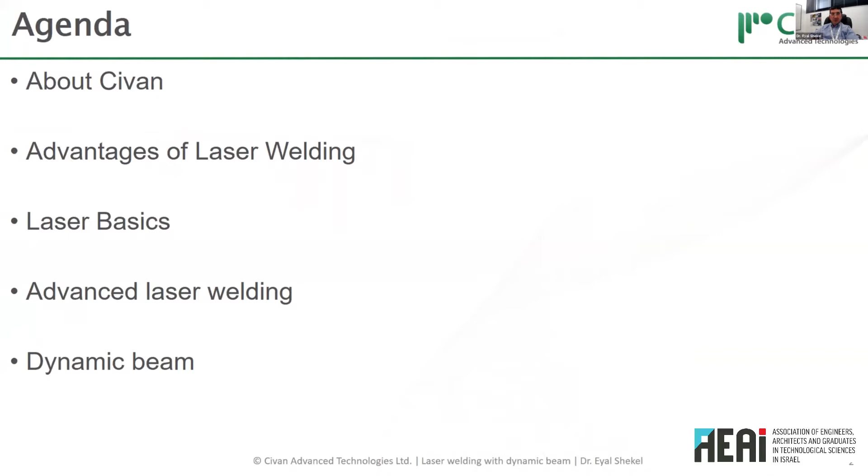So, as Shlomo said, Civan was established in 2008. What we do is manufacture high-power lasers based on coherent beam combining for material processing. We are 180 people, operating from 5 floors. We have a building in Jerusalem, 3,500 square meters. We have a proven track record with many customers, and we've been selling products for the last 12 years. We are a vertically integrated company, meaning we have in-house production of all the core technologies. We have more than 50 patents, and we do a lot of collaboration with many different research groups in Israel and abroad. We're based in Jerusalem.

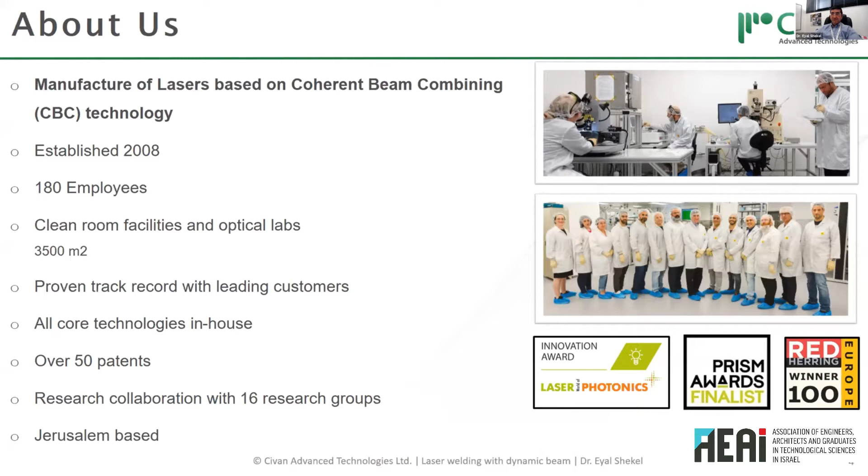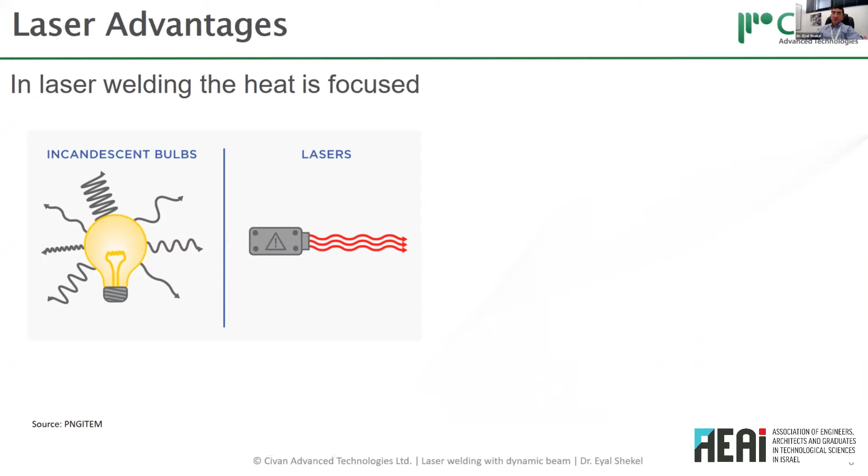So, what is laser welding? When we compare laser welding to regular welding, first let's start with: what is a laser? A laser at the end of the day is just a source of light. When you sit in a room like this, you have probably a few hundred watts of light in the room. But if you take a laser with a few hundred watts, you can actually cut metal. The difference is that a regular light source scatters light all around, whereas in a laser, all the light is focused and directed in one direction.

The result is that when you use a laser for welding, all the energy is focused and all the heat is concentrated, and you can get a very well-defined, narrow weld, compared, for example, to a tungsten arc, where the heat is spread over the weld and you get a much broader weld.

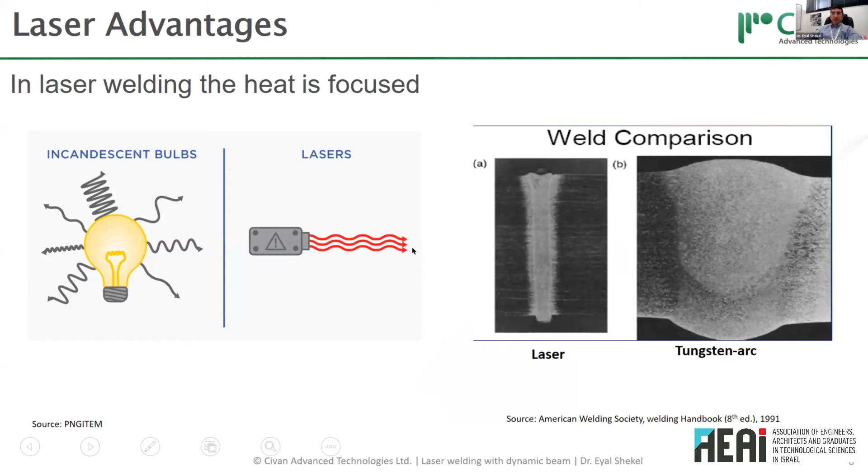So that results in a few advantages. First of all, the fact that all the energy is focused means you have a very small heat-affected zone. You can get much deeper penetration. The overall part has much smaller distortion. You can get faster welding speeds, and you are much more efficient using your energy. All this is because the energy is focused to a very small area, and basically in the time it takes the heat to move away from the weld spot, you get the welding process running before the heat spreads out.

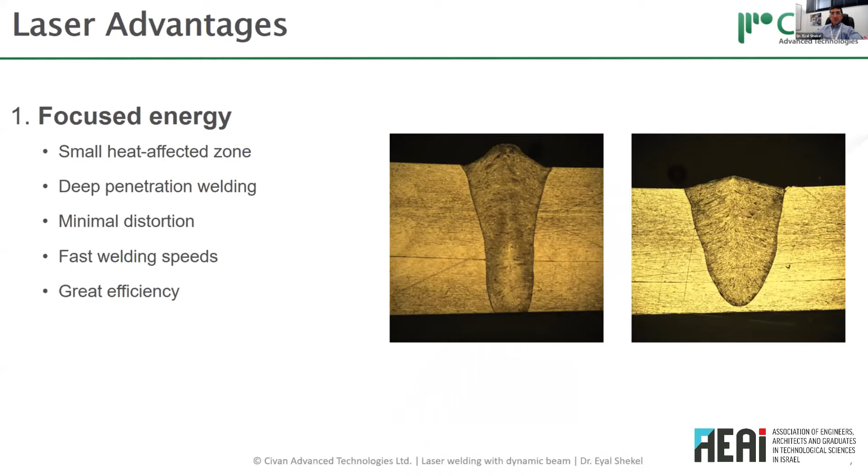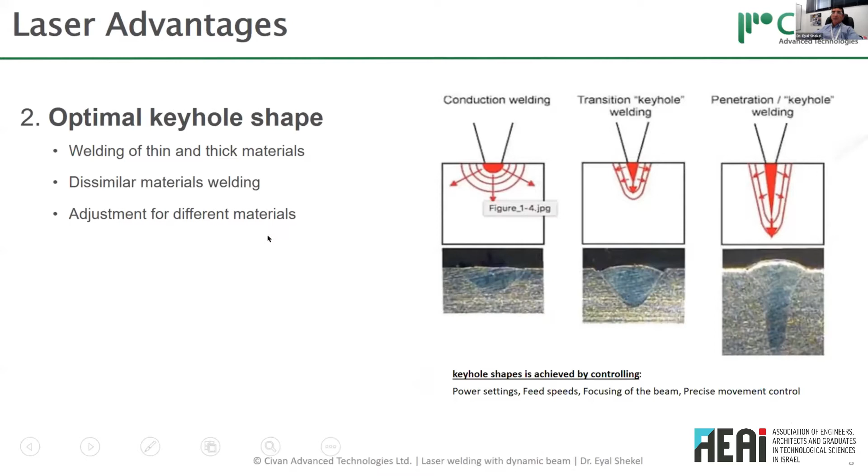Another advantage is the ability to do welding without a wire. Compare this to TIG welding where you have filler wire - in laser welding, you can do the welding without the filler wire. That gives you a much more flexible process because you don't have to make sure the wire gets to the right place and you don't have to feed the wire. So you can do remote operation, and the process can be easily automated.

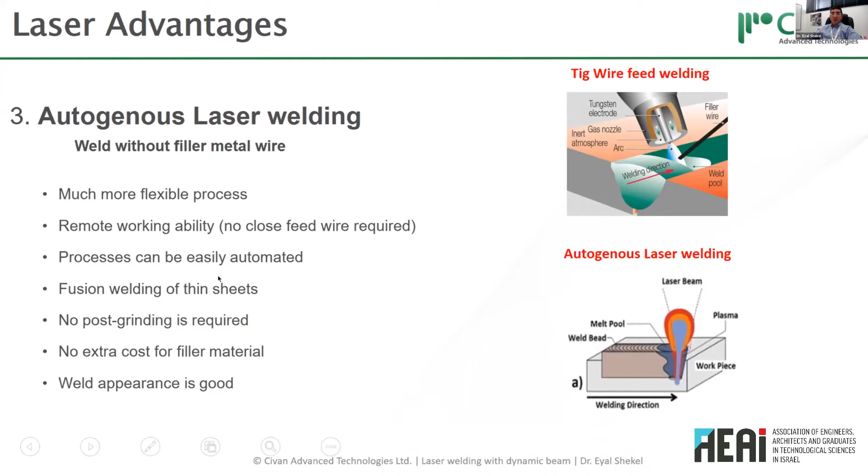You can do welding of very thin materials where there's no room to add a wire, and there's no post-processing needed after the weld.

So what is the basic concept of a laser? One of the most important concepts is the beam quality. As we described, one of the big advantages of the laser is that you focus the beam to a very small spot, but the ability to focus to a small spot has to do with beam quality. What we see here is a Gaussian beam, called a single mode laser with a Gaussian beam. This is the optimal beam shape, which allows very good focusing capabilities, compared to a multi-mode beam, which has lesser properties.

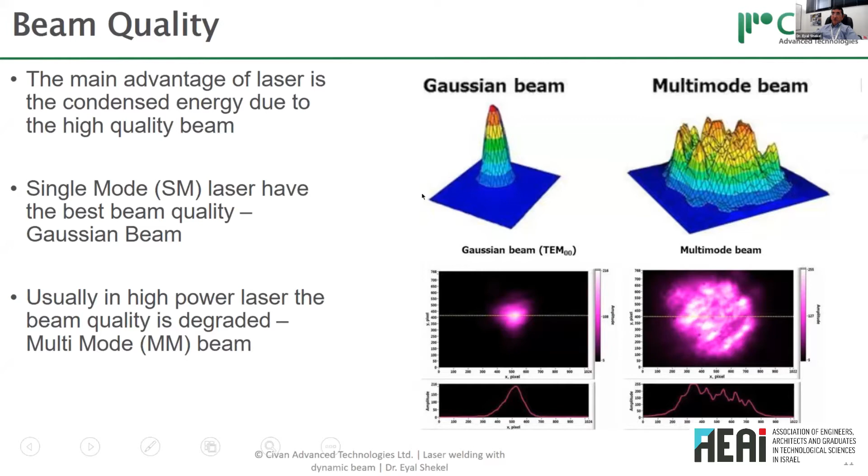Usually when you go to high power laser, the beam quality is degraded because you have to take a lot of power and concentrate it to one place - we'll talk about this in a few slides. But basically, the difference between a single mode beam and a multi-mode beam has two effects.

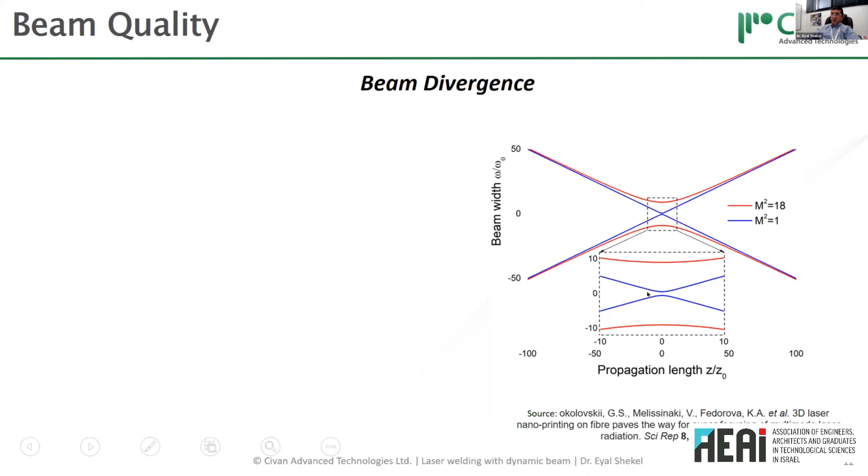First of all, with a single mode beam, you can get a much smaller spot. If you start with the same aperture with a multi-mode beam, shown in red here, compared to a single mode beam, you can see that the single mode beam can achieve a much smaller spot size.

The other thing is that the depth of focus is much bigger in a single mode beam. What you see here is a single mode beam that starts from a smaller aperture, gets to a very small spot, and this small spot is maintained over a large depth of focus. Whereas in a multi-mode beam, in order to get a small spot you have to use big optics and focus the beam very sharply, but then your depth of focus is very small - meaning when you move a little bit out of focus, the beam size becomes very big.

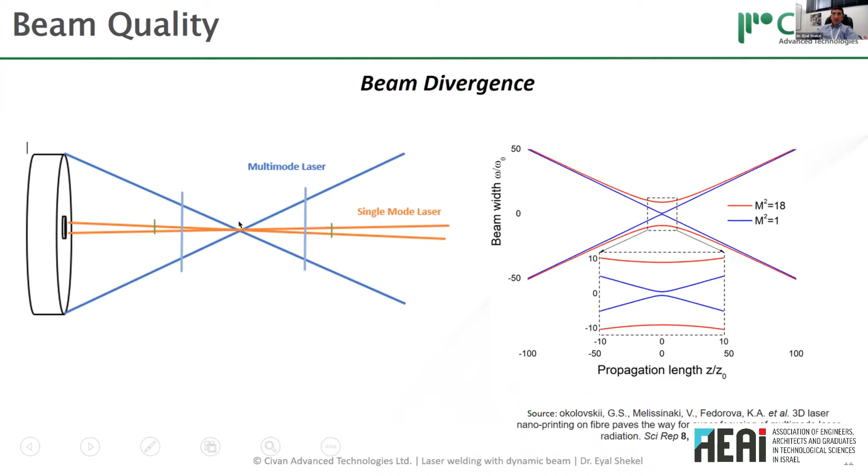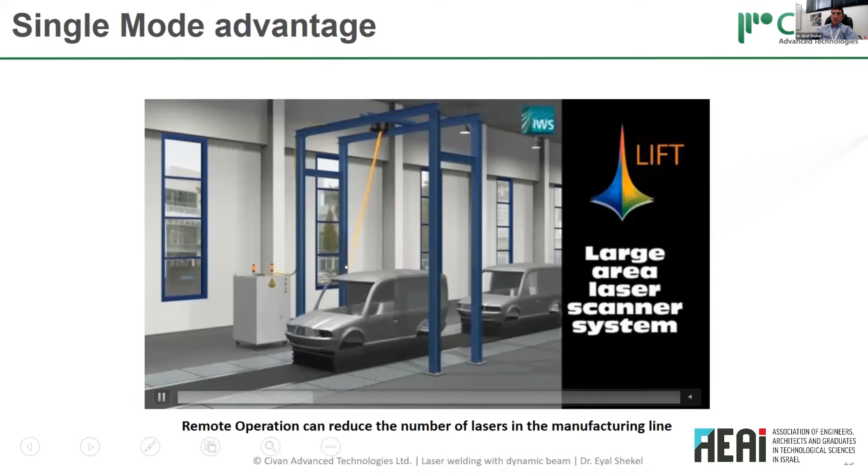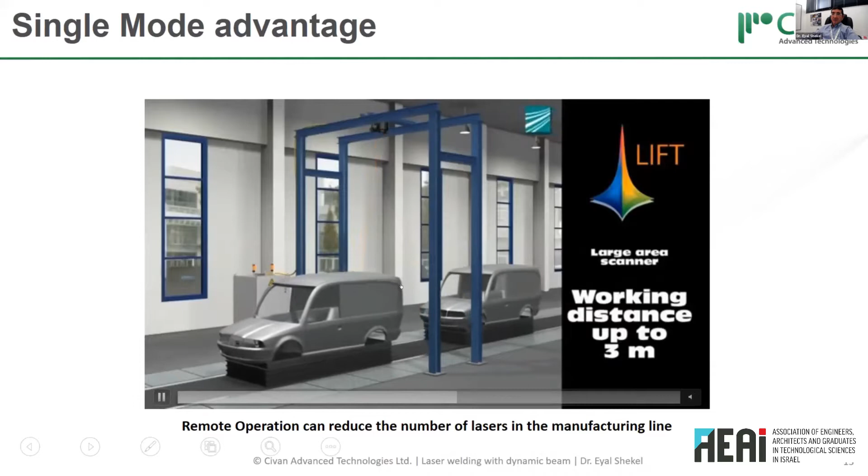So with single mode, the advantage is that you can work from far away - you have a very deep depth of focus and a very small beam even when working from far away. That means you can have the laser with fiber coming to a mirror, and the mirror scans and jumps from place to place, enabling remote operation.

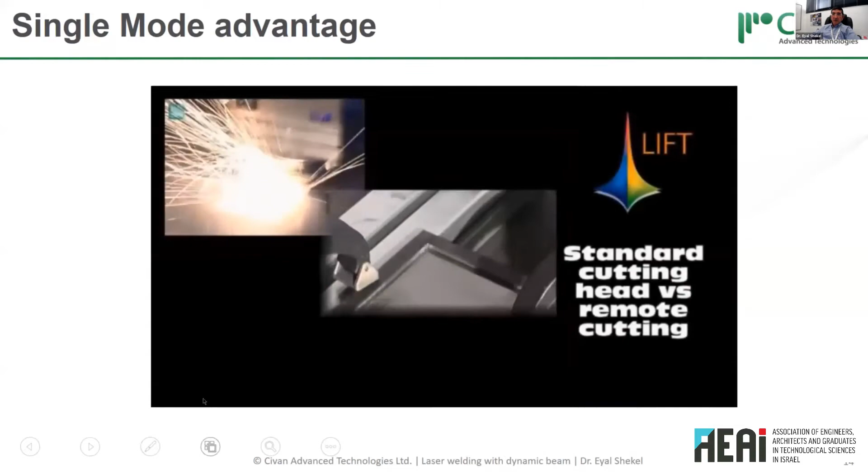Now this remote operation has another advantage, and that is speed. What we see here is a multi-mode laser cutting thin sheet metal. Going back a bit - because the depth of focus is small, you have to work relatively close to the workpiece, and then the whole laser, the whole optical head, has to move in order to make the cut.

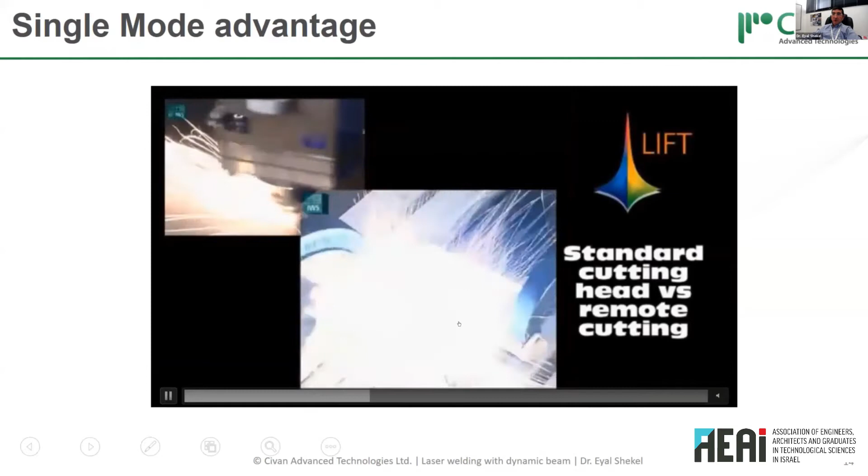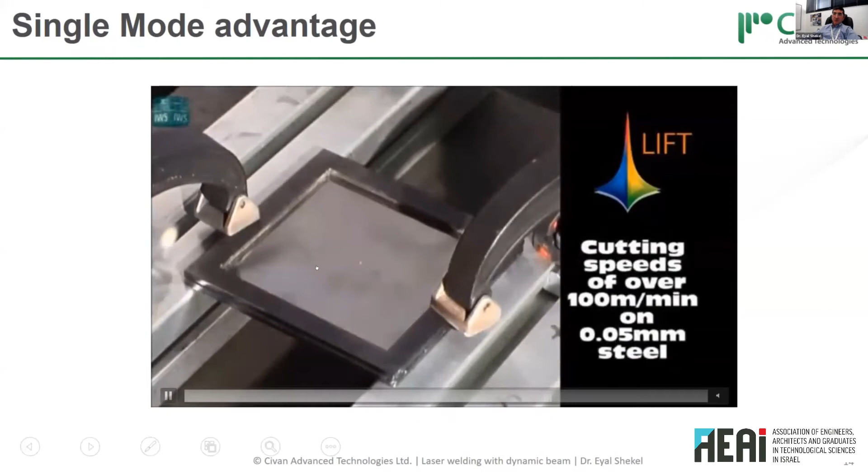So we discussed until now just general laser welding, but with a laser you can do advanced welding by adding some additional features to the laser.

What we see here is an example of welding aluminum tube to a die-cast metal. When you just try to weld them, you get a very poor quality weld. The reason is that aluminum and die-cast have completely different properties, both in terms of heat conductance, heat capacity, melting temperature, and so on.

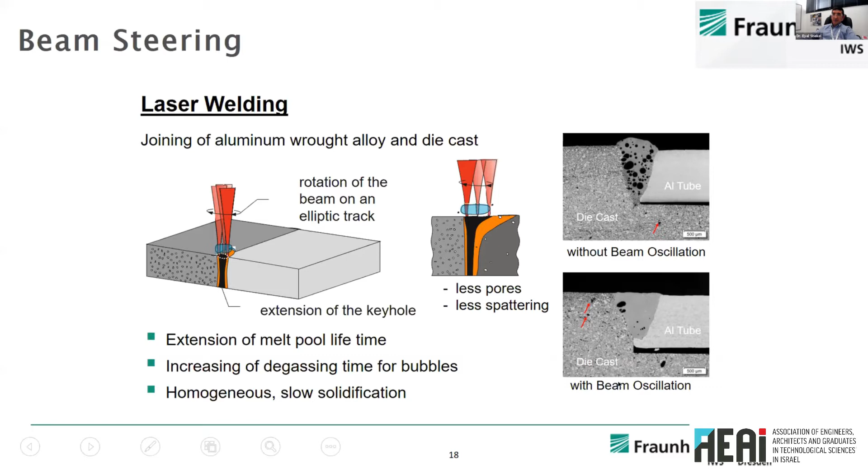If you would just come with a heat source and try to weld these two dissimilar materials, you get a poor quality weld. But if you have a laser beam - a small, narrow laser beam - and move it around inside the melt pool, you can control the energy distribution, the heat gradient, and heat distribution in order to get a very good weld between these two materials. This again is work done by Fraunhofer IWS.

Another similar example is overlap welding, when you want to weld copper to aluminum. If you just come with a single heat source, or a standard stationary laser beam, you get mixing of the materials and a very poor quality weld.

But if you move the beam around by oscillating it, you can control the width and depth of the weld. You can control the lifetime of the melt pool and the temperature gradient of this melt pool, making sure you don't have any mixing and no intermetallic phases - resulting in, overall, a very, very good weld.

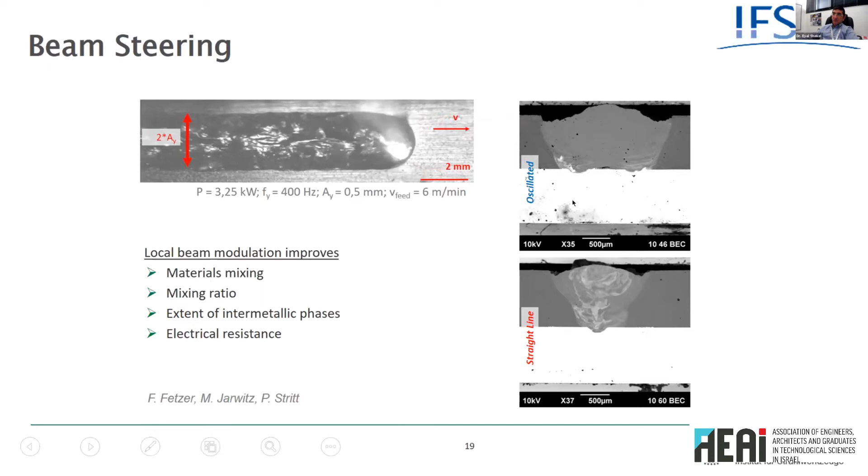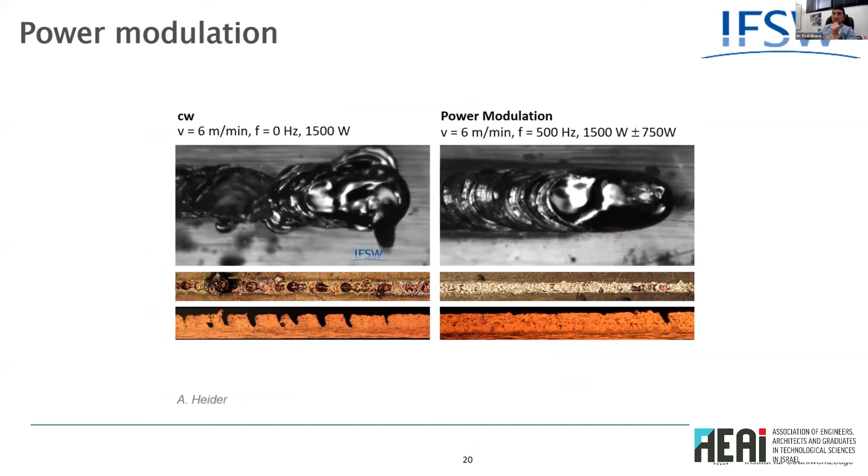Another example is welding of copper, and what you see here is a lot of spatter. This spatter occurs because you have a lot of power going into the material, causing explosions. But if you can modulate the power, reducing it before spatter is created, you can actually achieve a spatter-free weld. This is work done by University of Stuttgart, IFSW.

So what we see is that when you want advanced methods of welding, you need much better control of the beam. It's not enough to just take a lot of power and concentrate it in a small spot; you actually want to control the melt pool. Many companies are working on beam shaping or beam steering.

For example, nLIGHT has the Corona laser that has different shapes for the beam. You can see a small spot, larger spot, donut shape, different types of donuts, or even combining energy in the center with the donut. You see the same thing for IPG, what they call the AMB, and the Coherent ARM, where you can have a spot, a donut, or a combination of the two.

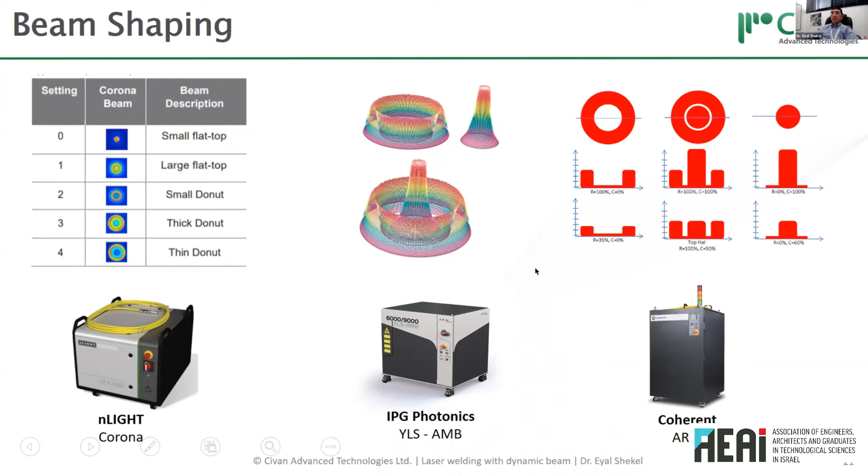Amada also came out with the Ventis system, which has beam steering. Basically, they take a small beam and move it around to create this beam steering, again for controlling the melt pool. And IPG also has beam steering to control the melt pool.

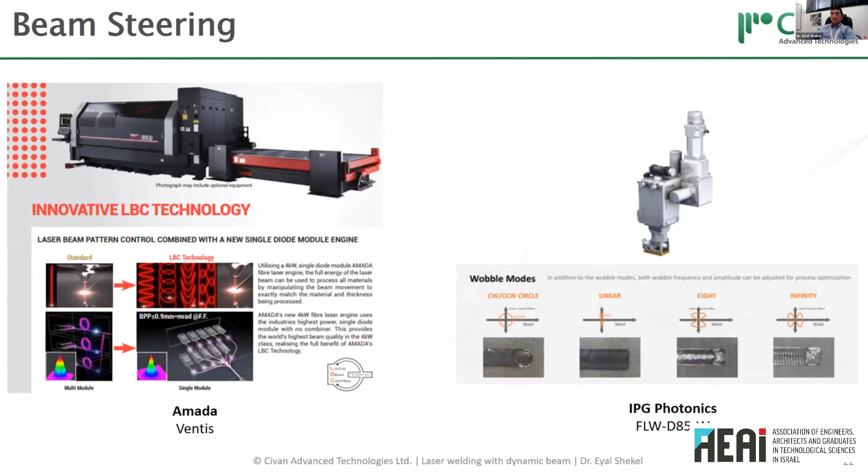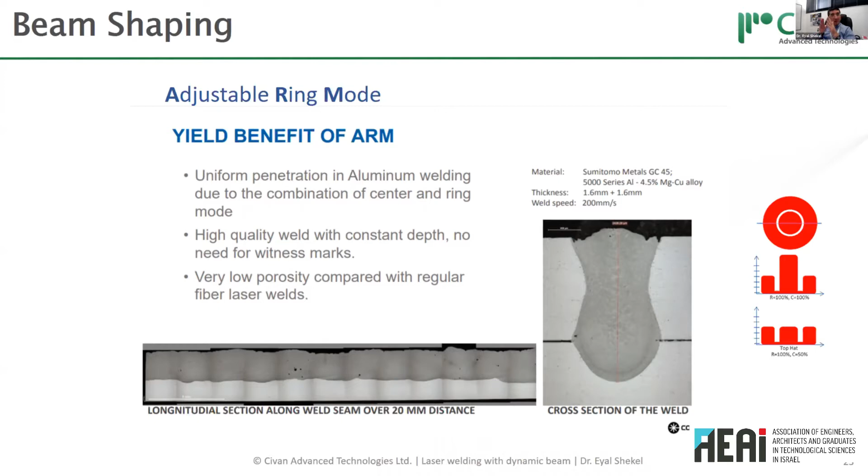This is an example where they use a donut with intensity in the middle, for welding aluminum. You can see a very good weld, no cracks, very uniform penetration along the weld, and no porosity at all. This is achieved by a sophisticated beam shape, not just a Gaussian beam or a top hat, but rather a more sophisticated shape.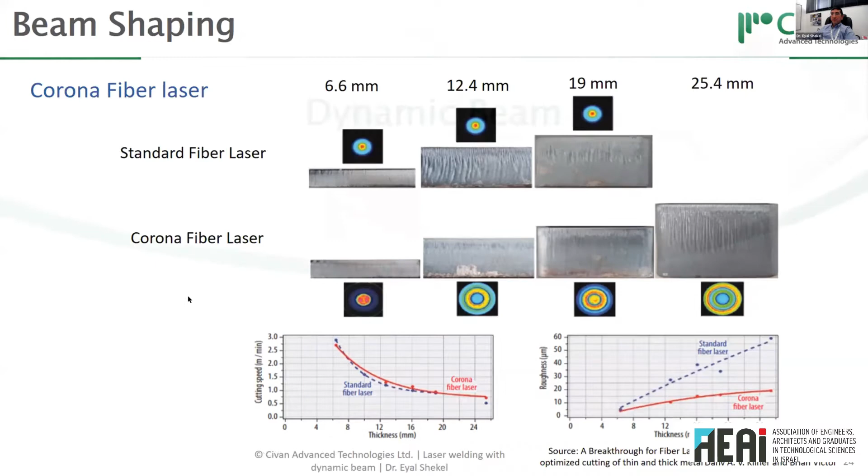So what we saw so far is, first of all, the advantages of laser compared to standard welding, where a laser can focus the energy to a very small spot, concentrating all the heat, giving us a much cleaner, smaller heat zone. Then we showed the more sophisticated beam shapes that allow for a higher quality weld.

And what I want to show you now is Civan's dynamic beam, which is really the most sophisticated way of doing beam shaping and beam steering. The Civan coherent dynamic beam is based on coherent beam combining. So what is coherent beam combining? Just in a few short slides.

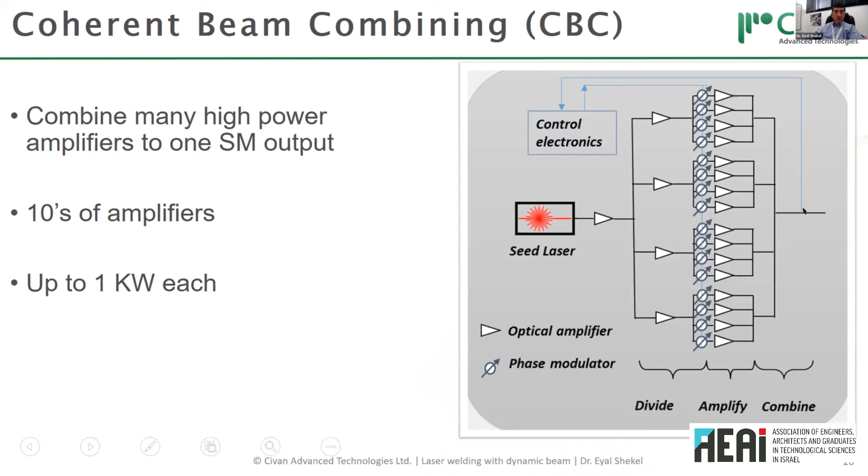The idea of coherent beam combining is that we can take many lasers and combine them together to work as one single mode output. As I mentioned, you can have a high power laser with a single mode output, but when you go to high power, usually the beam quality is degraded. The unique thing about coherent beam combining is the ability to get extreme high power while still maintaining very high beam quality, plus, as I'll show, the ability to control the beam shape. So what we see here is a schematic: we have a seed laser, we amplify it, control the relative phases, amplify in many amplifiers, and combine them to get a single mode output at tens of kilowatts.

There are two methods to do coherent beam combining. One is called filled aperture with a single mode output, where we take several lasers - in our case, tens of lasers, each with a kilowatt output - to a common optical element. By controlling the relative phases, we can have the energy of all these lasers coming out as a single mode output.

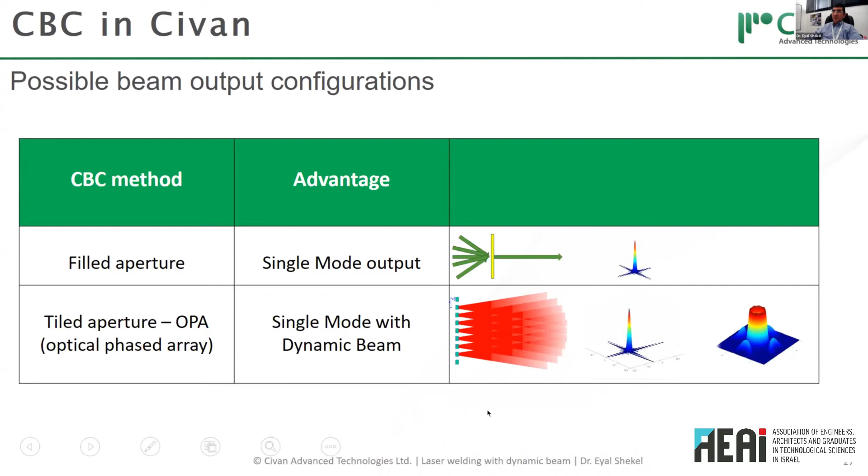The other method is called optical phased array, OPA. The idea is that not only can you get a single mode output, but you can actually control the position and shape of the combined beam. Here we can get more than 100 kilowatts with a single mode output and a dynamic beam.

So how does that work? Every laser, when you turn it on, will have some kind of cone of light coming out, creating a spot of light. When we turn each laser individually, each will create its own spot. But when we turn all the lasers on together, there is overlap between them, and in the overlap zone there is destructive and constructive interference between the lasers.

In places where there was light before - in this whole cone of light - you actually get destructive interference, creating areas of darkness or very low intensity because of destructive interference between the different lasers. And all the energy from all these lasers is concentrated in this area.

So what we get is these lasers overlapping to create this interference pattern. By controlling the relative phases between the lasers, we can control the output beam to change position, shape, focal distance, and so on. We have full control of the output beam shape, position, and focus just by changing the relative phases.

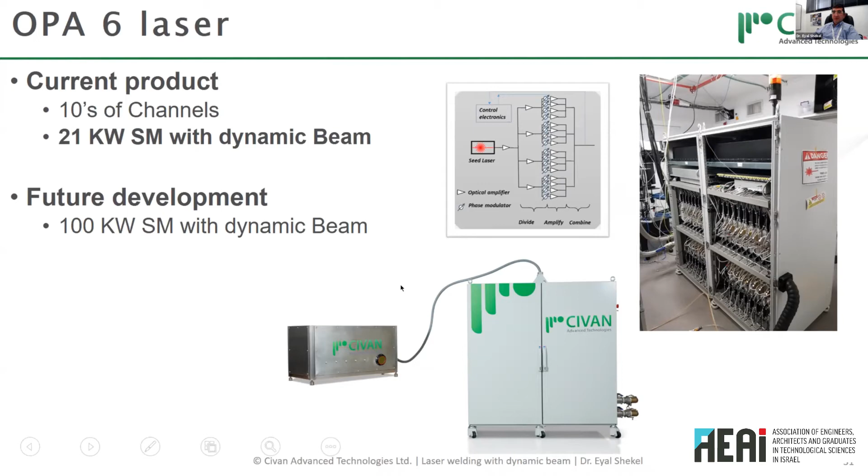So our dynamic beam can do any arbitrary beam shape. We can do beam steering, basically moving the beam around. You can move the beam either at megahertz speed, which effectively is like having a beam shape, or at kilohertz, which is really steering the beam inside the melt pool.

For example, here you can see any arbitrary shape. For welding two dissimilar materials, you can deposit a different amount of energy in one material than in the other.

We can change the focus, so you can focus the beam in the depth of the material. We can also do power modulation, like we showed before, controlling the melt pool to have a spatter-free weld.

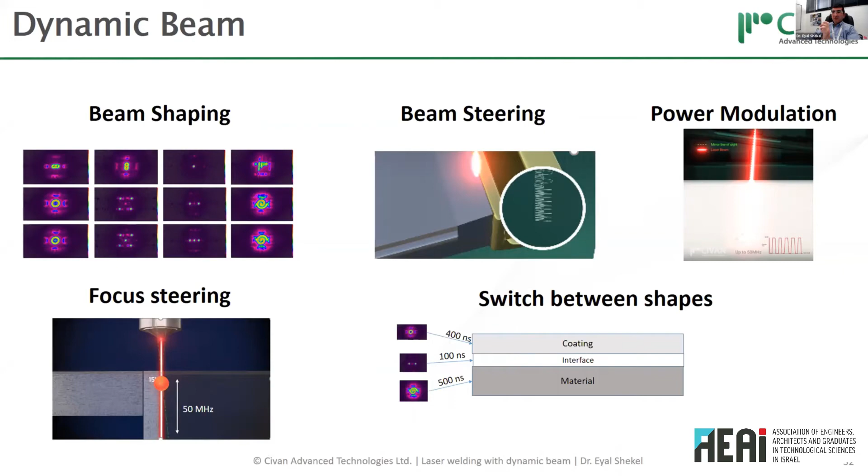Also interesting: if we try to drill through composite material with several layers, we can change the beam parameters as we go through. For example, if it takes 400 nanoseconds to drill one layer, another 100 nanoseconds for the second layer, and another 500 nanoseconds for the third layer, each layer will have its own beam shape and parameters to achieve a perfect drill. Each material gets its tailored beam.

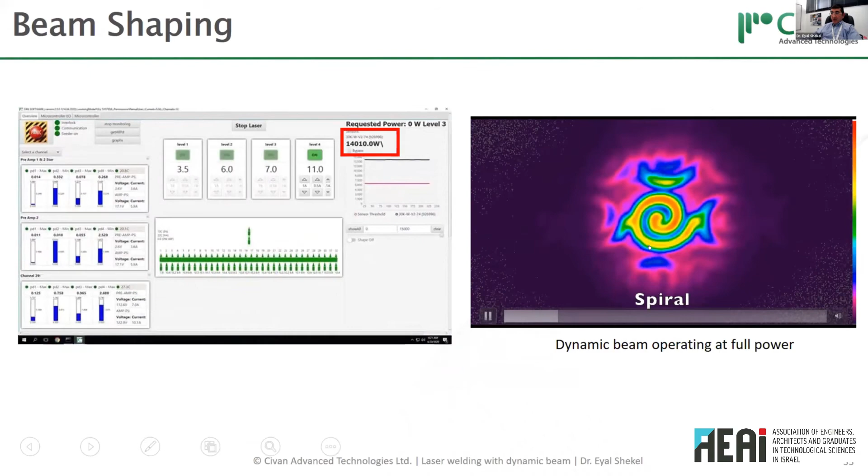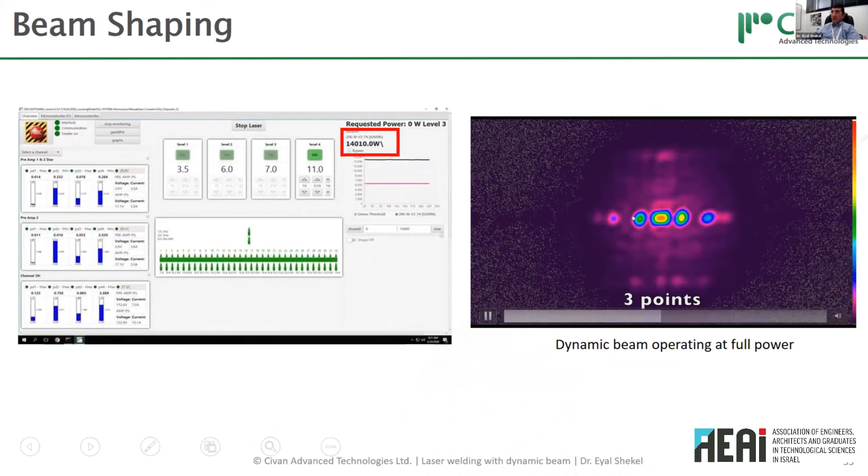So here we see some examples of arbitrary beam shapes. This is all done at 14 kilowatts, and you can see any arbitrary beam shape. You just jump from one beam shape to a different one, and this can be done at nanoseconds between beam shapes.

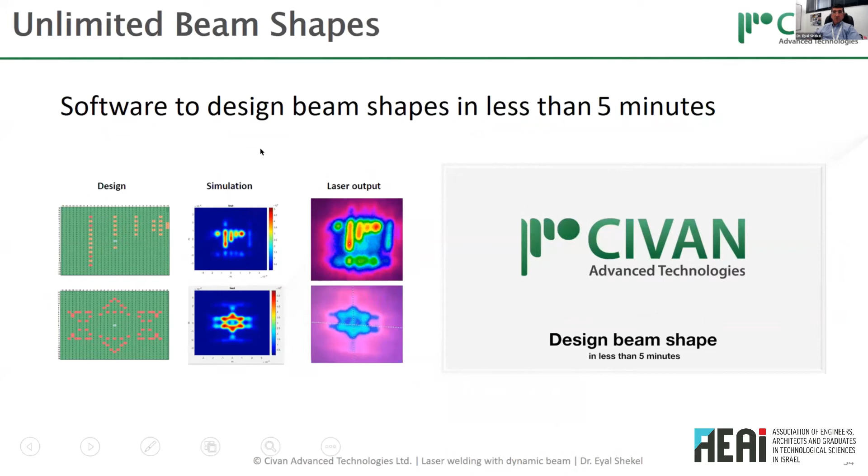We have a very simple software that allows the user to design any arbitrary beam shape that they want. You have this chart where you mark any shape that you want. You can choose the order by which the beam is going to go from area to area. And you get right away a simulation of what the beam is going to look like.

You can see here that the shape was not perfect. In the simulation, you get a shape that is not exactly what we wanted. So we can go back and do a little bit of optimization to the beam shape, move things around a little bit, change the intensity in every area, and get a simulation of what the beam really looks like.

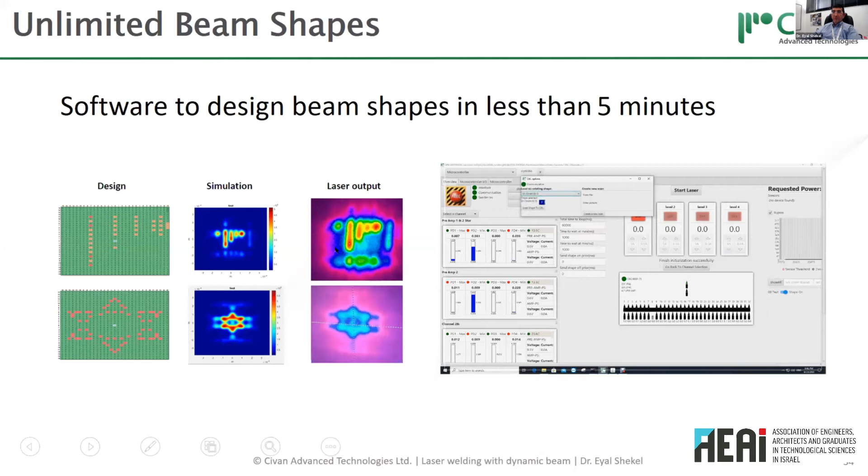All you have to do is upload this file into the laser, and then you can just pull it from the laser anytime and you get this beam shape. So what you see here is the design, the simulation, and then the output. This is at full power, 14 kilowatts, and you can see that the actual output is very similar to the simulation.

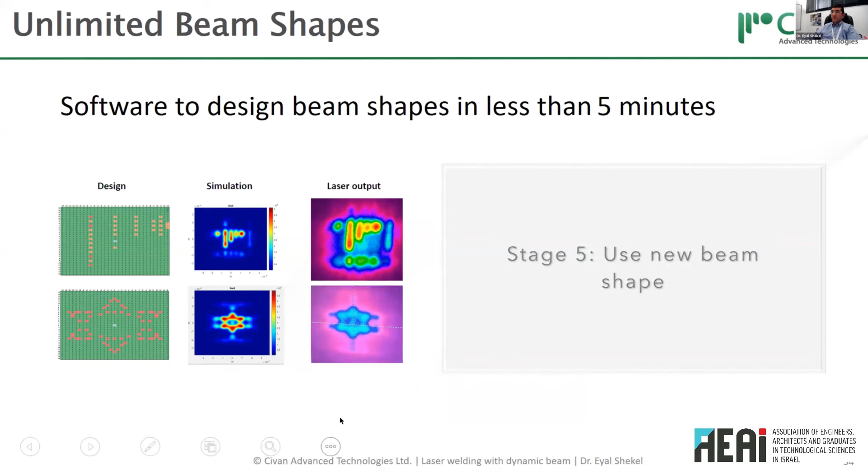So you see here, this is at 14 kilowatts, very similar to the simulation that we showed in the software.

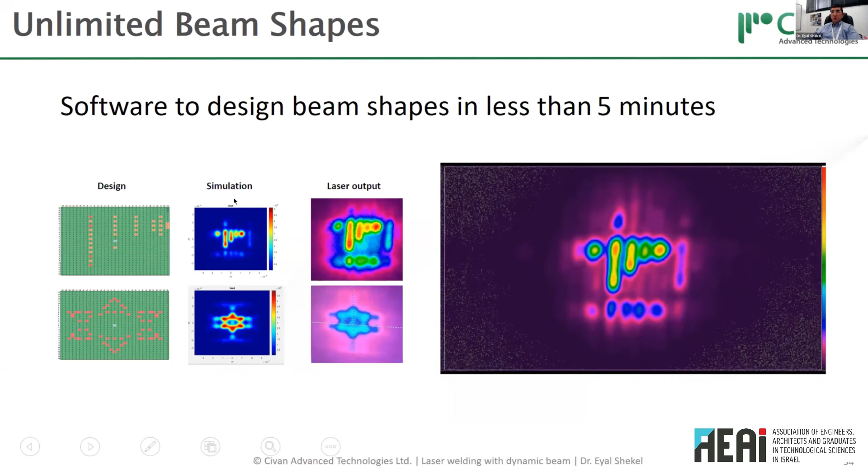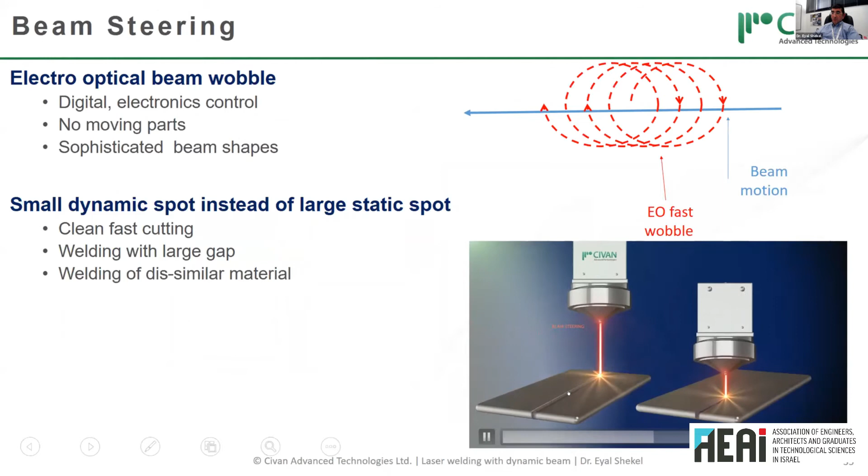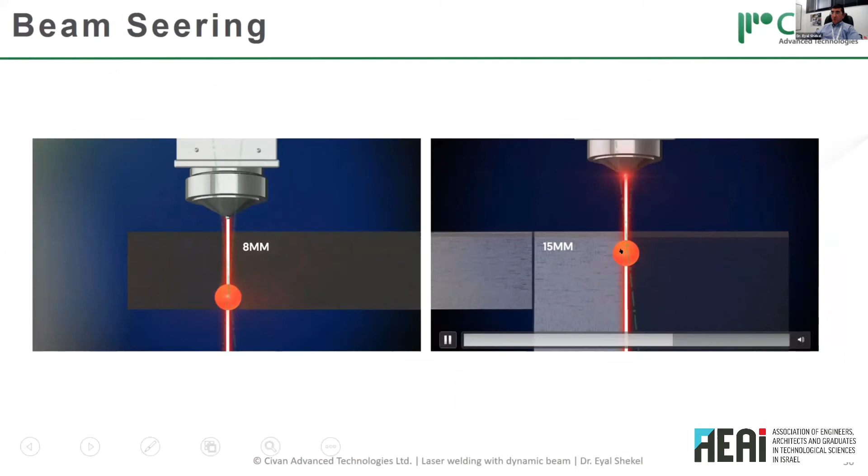So this all gives us the ability to control the melt pool by controlling the beam shape and beam position. We can control the depth of the focal point. By doing this all together, we can control the position and shape to get full control of the melt pool.

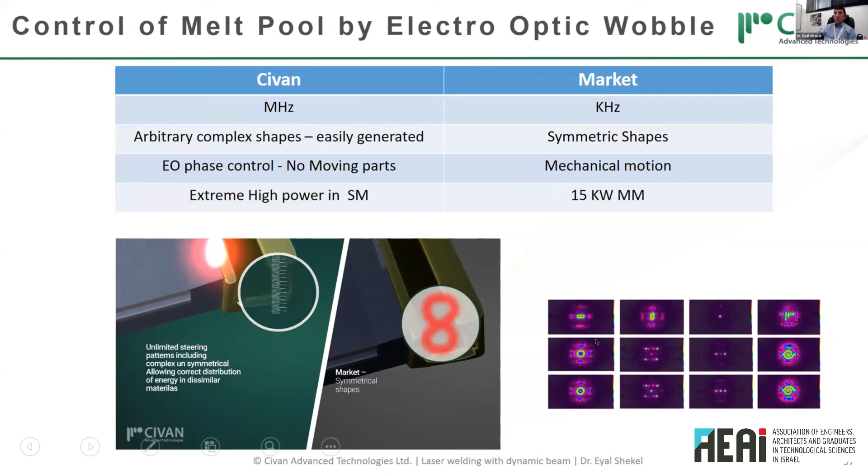Now, when you compare it to what we showed before about what other companies do, like Amada or IPG that can do kilohertz beam steering, by us it can be done at megahertz. Usually, when you have a mechanical scanner, you have to go at some symmetrical shapes or at least continuous shapes. With Civan, you can do any arbitrary shape. It's not a mechanical motion, so you can do it much faster, no moving parts. You can get to much higher power and do it much faster than any other method available in the market today.

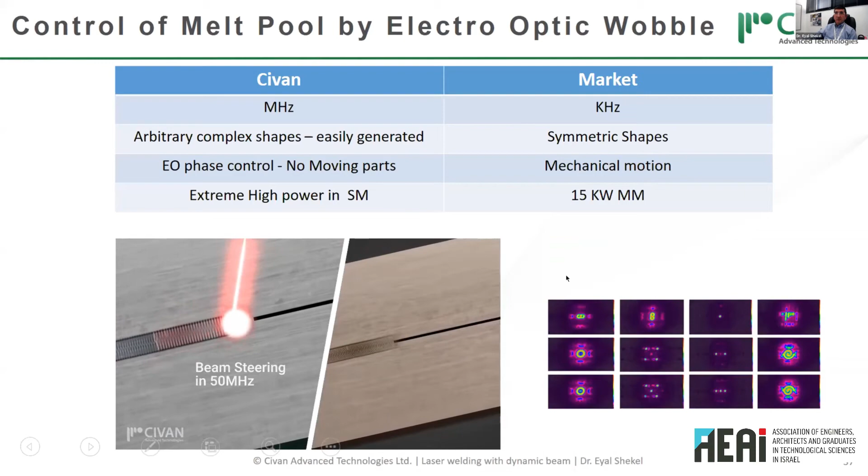To summarize these advantages, we're talking about the ability to do keyhole modulation for spatter-free welding. We can do melt pool modulation to get a homogeneous mixture. We can do temperature modulation to reduce the transient stresses, and keyhole modulation for non-humping high-speed welding.

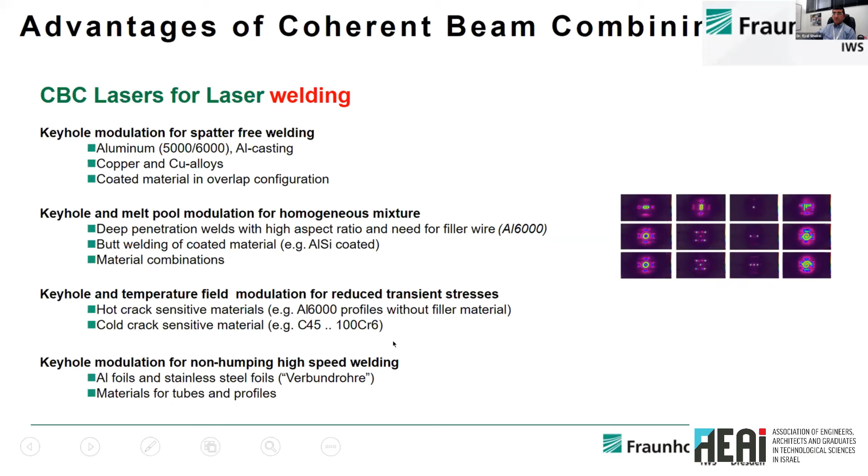The point is that every process, every type of weld is going to need its own beam shape. It's different if you do cutting or welding. It's different if you do thick material or thin material. Every material will need a different optimization. If it's crack-sensitive materials, it will need different shapes. So every process is going to need its own specific beam shape.

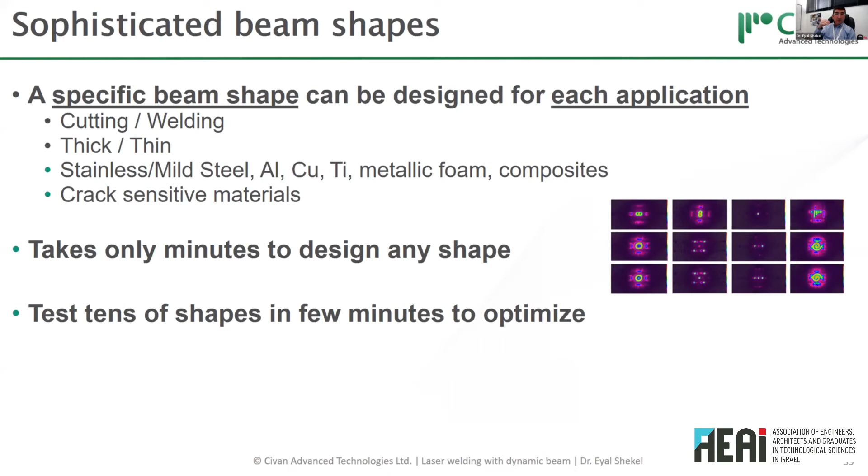But as you saw, it only takes minutes to design any beam shape, and you can optimize the beam shape, and it takes minutes afterwards to upload any beam shape into the laser and actually optimize to get the optimal process. In the future, we think we'll also be able to do real-time adaptation, because we can change the beam shape in nanoseconds. So if you have some high-speed camera or pyrometer or OCT, you can actually, during the process, optimize the beam shape to get the best possible process.

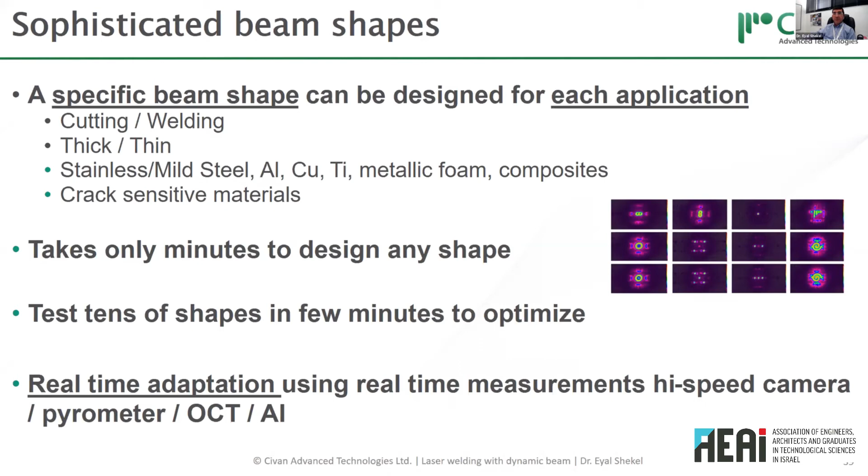So in Civan today, we have our application lab. We can see here a 16 kilowatt laser with the optical head going to an XYZ table. And you can see here the control room where we control the laser. You can see here, we can see the beam shape coming up. And we see here the workpiece as it goes through. This is where we do all the experiments and process development for different customers.

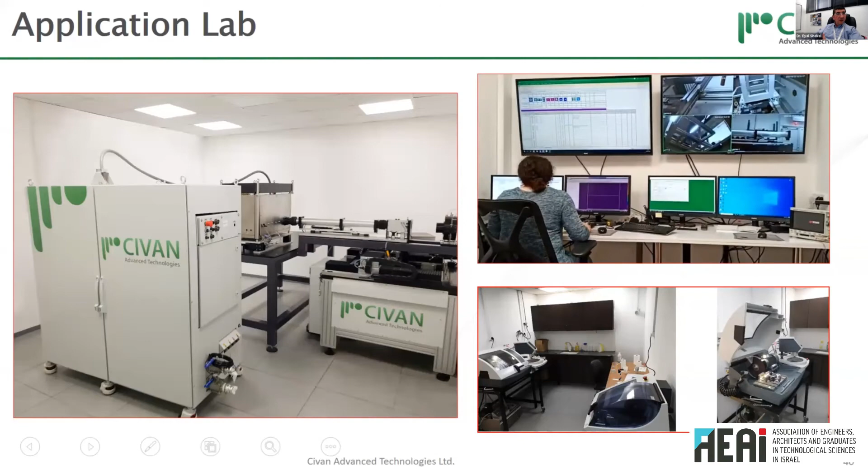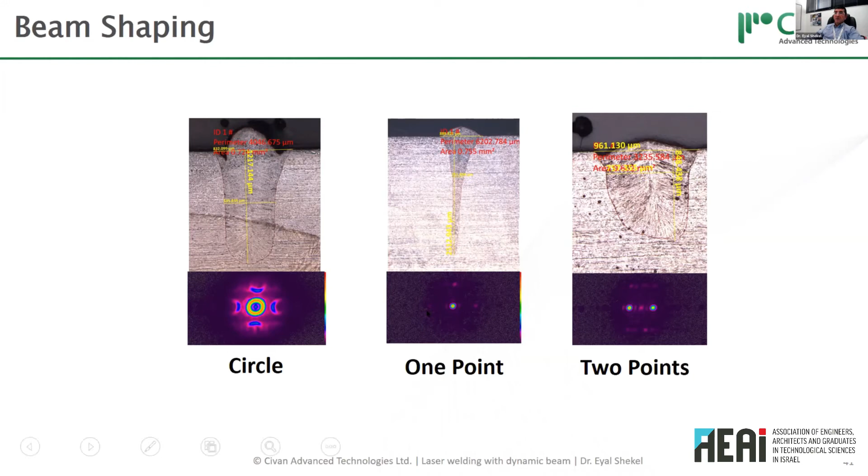We also have a small metallurgical lab where we can actually take the samples and analyze them. This is just a few examples of what can be done, and you can see with different beam shapes, of course, you get completely different cross sections. This is the ability really to design any beam shape, use our application lab, and do process development for any process that's required.

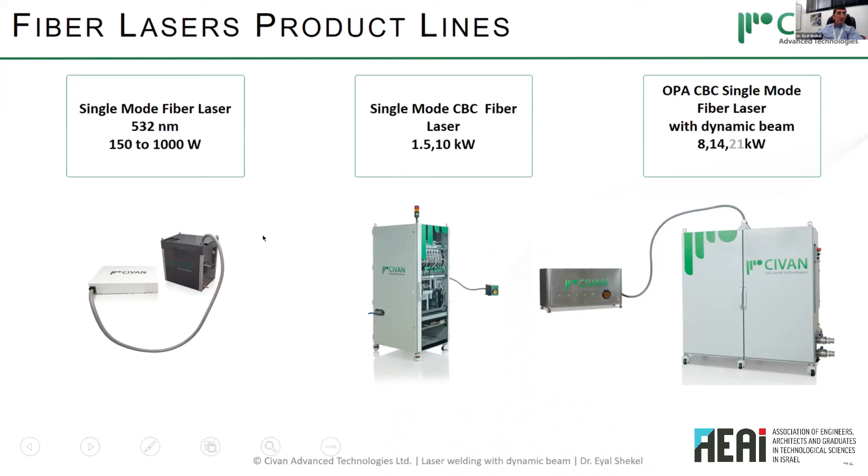So today we have 3 product lines. Most of my talk was about this product line right here, the OPA CBC single mode laser with dynamic beam, where we have different power levels up to 21 kilowatts, and soon, like I mentioned, we can have up to 100 kilowatt output. We also have the single mode laser, if you just want a static single mode beam, up to 10 kilowatts. And we also have a green laser, which has its own advantages in welding.